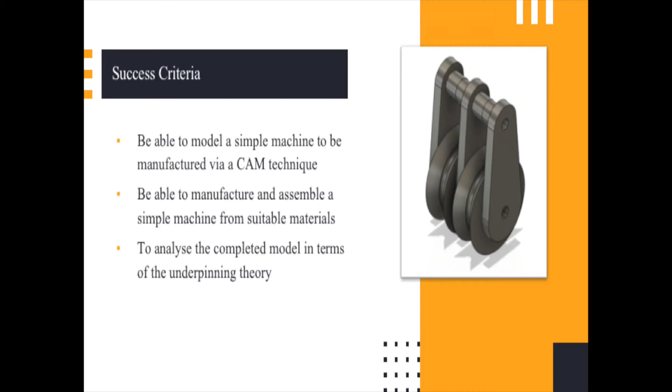We're going to construct a simple bearing-free pulley. It's just going to use or rely on the relatively low friction of 3D printed parts, plus a couple of screws in order to give it the strength it needs to be able to hold up some cord. The cord is going to be 2mm blind cord, and as a result we'll have certain measurements going there.

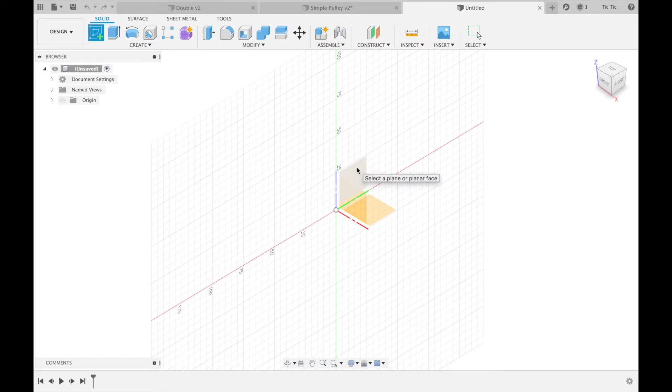We're going to start straight away with a sketch, and we're going to start with our pivot point. We're going to put it on this plane here, so the sideways plane, for want of a better word. I'm going to start off with a circle, and it's going to be a 3mm circle.

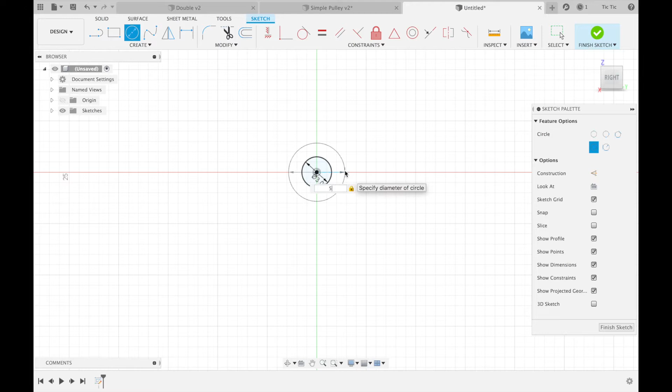The 3mm circle is to do with the fact that our pulley is going to be held together with M3mm screws. So I'm now going to draw another circle here, and out we come. I'll probably take it out to, because we've got 3, maybe 5.5mm. It doesn't really need to be totally accurate, but 5.5 makes it a reasonably strong join. 2mm on top of the 3mm, which would be 5, is not going to be quite as strong as I want, so 5.5 will be good.

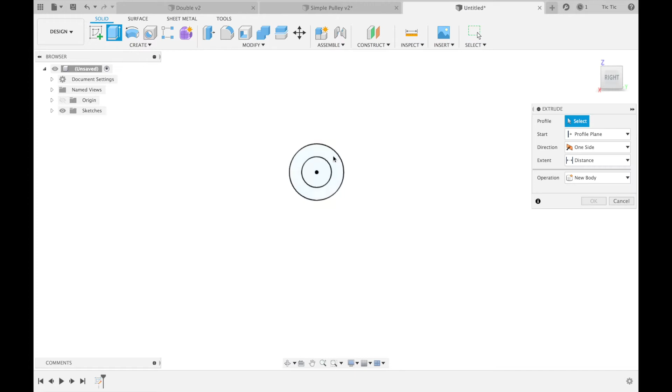And I'm going to finish that sketch. I'm going to bring it out. So I'm going to modify the sketch or extrude it out 4mm. Sorry, we'll make it 3mm, which will give me 6mm to play with either side. Let's just make it 4 to be sure, and go OK. So it's now a 4mm little cylinder there.

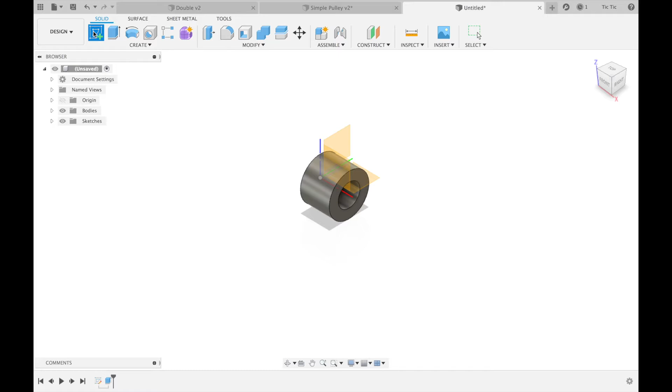That won't take very long to print if I was to print it, but we need a bit more on this. I'm going to create a new sketch now, and this is going to be the cross section of the outer side of the pulley, the bit that the string or blind cord will work around. And I'm going to click on this one here to draw this.

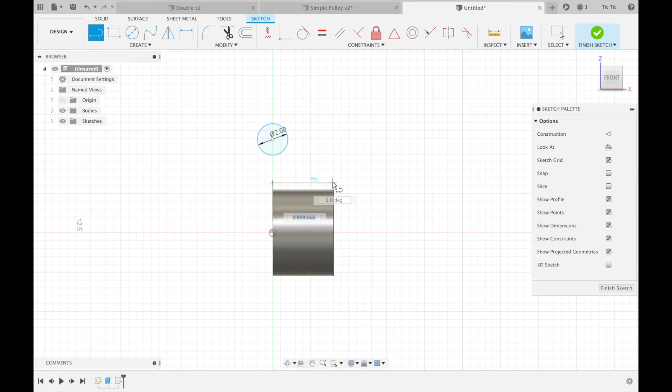It's going to need a circle in which to run, and I'm going to make the circle to be 2mm, which is the size of my blind cord. I'm now going to draw a line tool, and I'm going to line up from here to here, try and keep that sort of horizontal. I'm going to go up here a bit, I'm going to come down into the circle and finish that off. And I'm going to start from this point down here and come into the circle as well and finish that off. And it should close off nicely.

The next thing I'm going to do is I'm going to use the project tool, which is down here. My shortcut key is P. And I'm going to project this line and this line. So I've got my reference points and press OK.

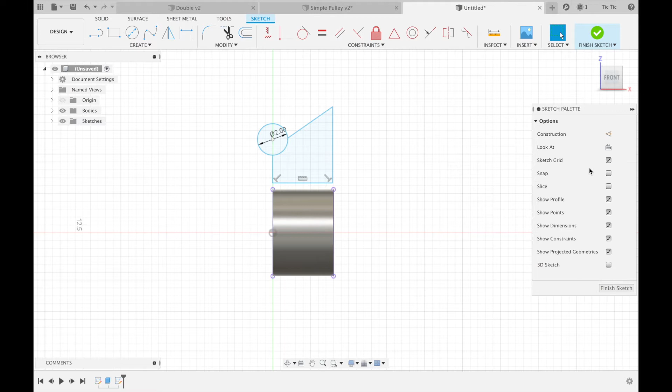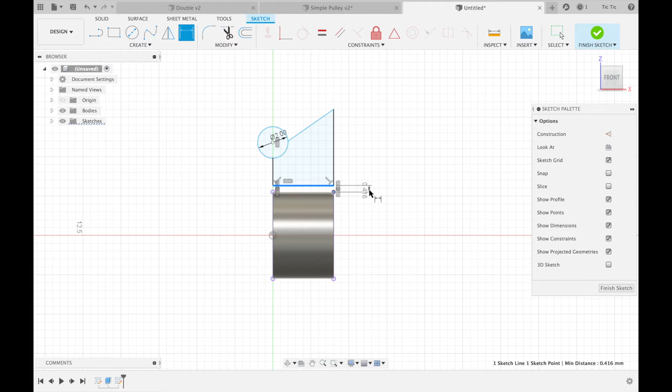So I'm going to use the horizontal vertical constraint tool to constrain these two lines here, these 2 points here, and that point and the circle. So that's all constrained there nicely. I'm going to set this dimension from this point here to this little point in here to be 0.4mm, which happens to be the width of my nozzle on my printer. So that's how wide the string is going to be when it draws it out on the 3D printer.

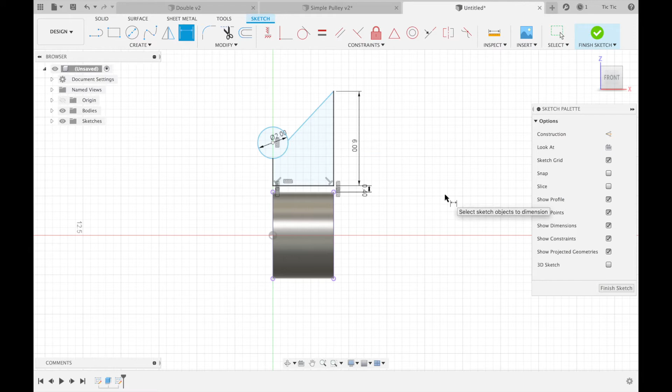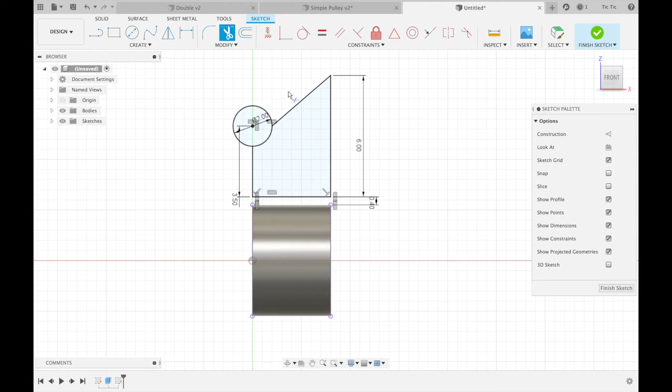I'm going to set this height here. Let's just set it to be 6mm, and let's set this distance here from here to here. Let's just make that 3.5mm, and I'm fairly happy with that. I should probably also line up this point here with this point here, and now I've got a fully constrained sketch. If I really wanted to, I can press the T tool to trim and get rid of the outside of this, and I'm going to finish the sketch.

If I bring it back around into this mode now, I should be able to use the revolve tool. Click on that section, select my axis, which is going to be, it's pretty tricky to get, that red line there, and it should revolve around there like so. If I spin that round, you'll see what I'm heading for.

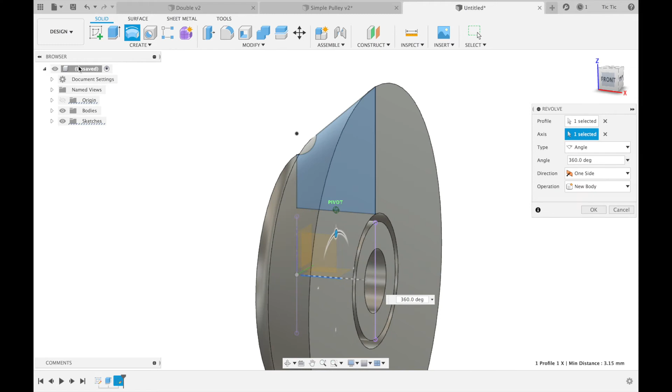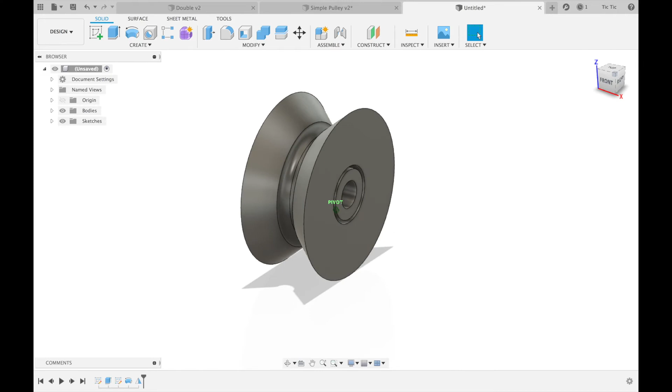I'm now going to press on OK, and I'm going to use the mirror tool to get that doubled over. So create, mirror, and on this one, and the mirror plane is just going to be this surface here, and I'm going to press OK. You can now see that I've got the outside of my pulley. It's like a cotton reel, and that gradient there just helps to keep the rope nicely in place.

I'm now going to modify this and combine this one and this one with a join, keep those two unchecked and go OK. So now I have the inside of my pulley. I'm going to create a new sketch now on this little surface here, and I'm going to press P to project on there, and I'm going to press OK.

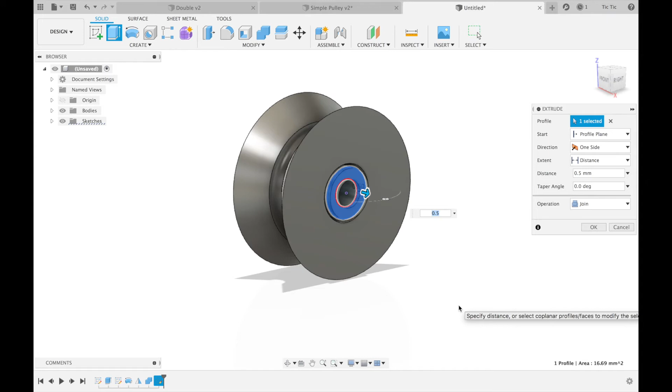Finishing that sketch I created, I'm going to extrude that out 0.5 millimeters. So now the length of this is going to be 4.5 millimeters out.

I'm now going to use that surface to create a new sketch. The new sketch will be a circle up here, 3 millimeters, which is going to be my second screw. So type in 3.

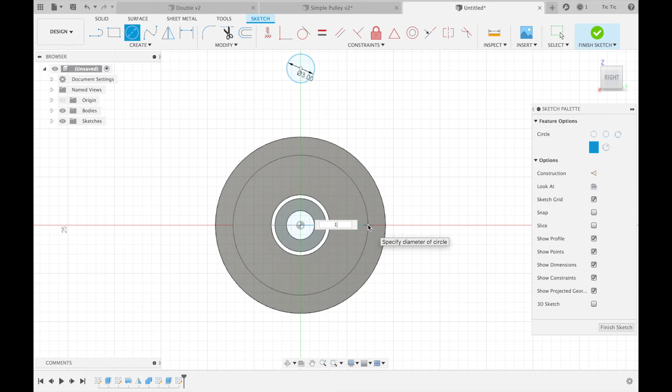I'm going to draw a circle down here and just make it the size that makes it look okay. Let's go with 14 millimeters. And I'm going to draw a circle around this point here again, let's go with 8 millimeters. That'll make it nice and strong.

I'm going to use the dimension tool and make this point, in the middle of this circle, a nice even number. Let's go 18 millimeters. That'll keep it nice and clear of the rope, so I can tie another rope around up here if I have to.

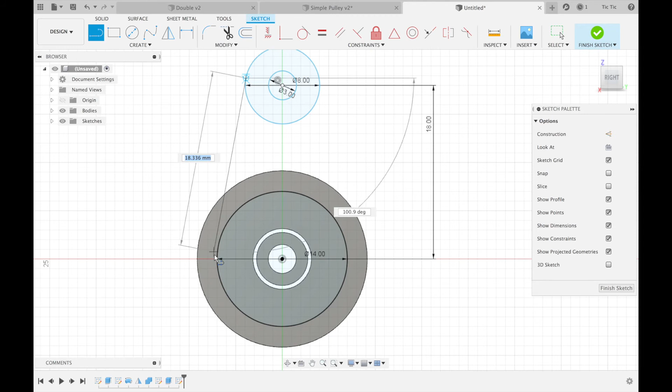And I'm now going to draw some lines. If I click and hold, they'll stay as tangents, which is useful. I want them to be tangents on that line there, to that line there. You see they've got the tangent constraint now, and down here, tangent constraint.

Just to make this nice and neat, I'm going to line up these two with the horizontal vertical tool. Let's get rid of some excess lines. I don't really want that line there, or that one there.

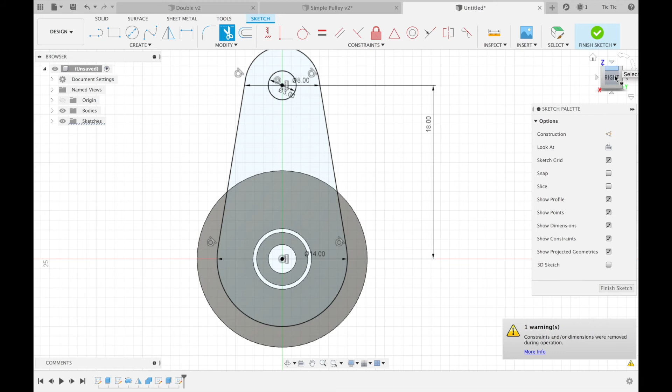I think I'm going to need a 3 mil hole here to match that. So I just need to project that hole there, go OK, and finish the sketch.

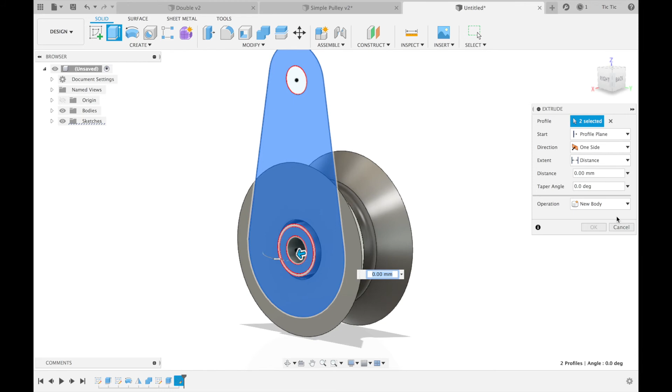Now I should be able to extrude this, and that bit there - I didn't need to project that extra bit. I'm going to create a 3 mil extrusion, quite thick. I could probably go 2 mils at this point because it's going to be printed sideways, so it'll be strong enough. And I'm missing a little bit in there so that that's nice and joined.

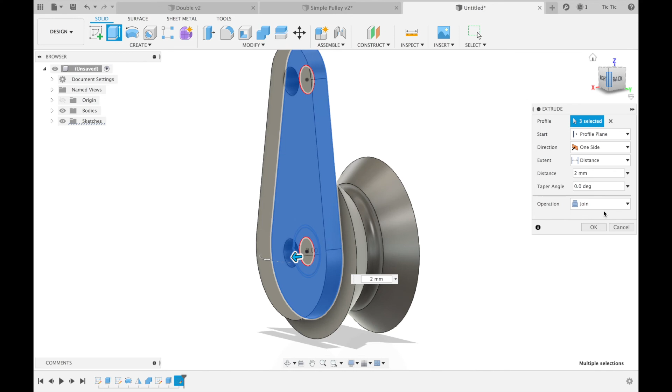That's bad by me. So basically I've got that part there. And if I go OK, and turn off my second body, you'll see that I've got this part here. I need to bring out another one equal to that on this side.

So I'm going to draw a circle from the midpoint here. Let's just go with 5 millimeters. It doesn't need to be too strong up the top - it's not bearing a lot of weight. And I'm going to finish that sketch.

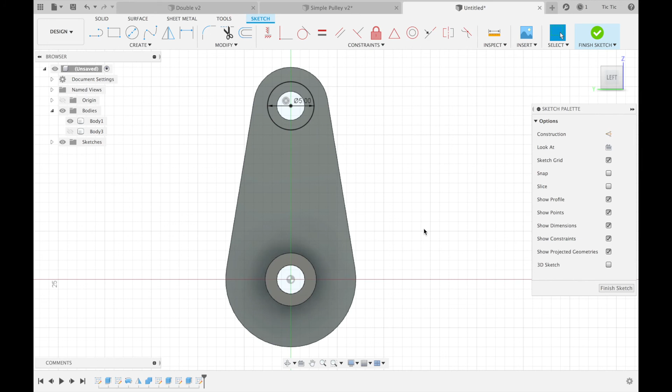I'm going to press the extrude tool and bring it out. Instead of a distance, I'm going to bring it out to object, using this face as the object. So it's going to match that length out, which just happens to be 4.5 millimeters. And I'm going to press OK.

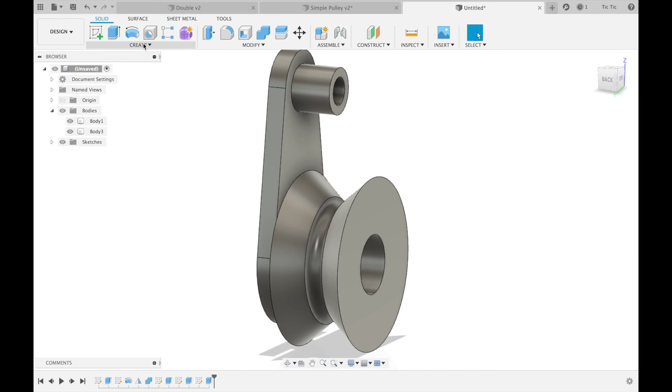Turning my body back on, I'm now going to use the create mirror tool, and I'm going to mirror this body around this plane, and press OK.

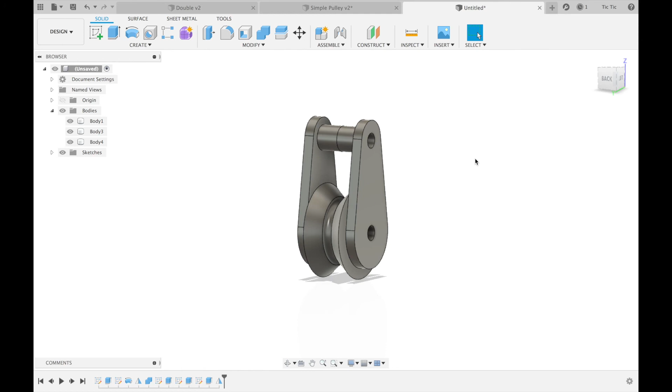And I now have a simple pulley that can hold a 2 millimeter blind cord. That will be quite strong, primarily because it has steel pins going through it in the form of M3 screws, which should fit through there nicely.

Some different modifications you could do to this pulley: for example, if you want to bring another rope up or a third rope up and tie it through this point here, so the rope will go from a bottom pulley up around there, around the bottom pulley again, and then back through this rope here to give you extra mechanical advantage - you can basically have that modification on there.

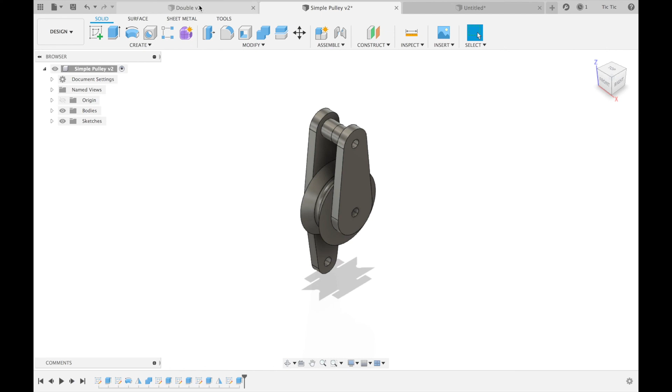The other one is you could do a double one, and the simple thing about this double one - if you look at the parts, turn off all the other parts that we don't need to see to do this - that's the extra part that you need, plus you need to print these extra parts.

What you're going to need to do now, apart from obviously saving this, is export this part here and this part here as two parts, and print two outsides and one middle coil, or reel, and then we can basically have that assembled with two M3 screws.